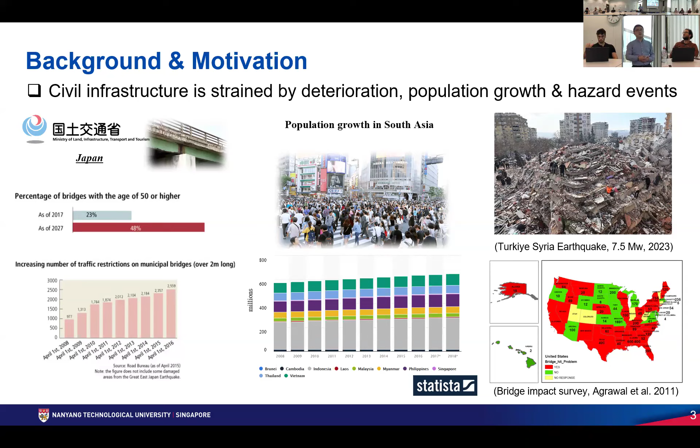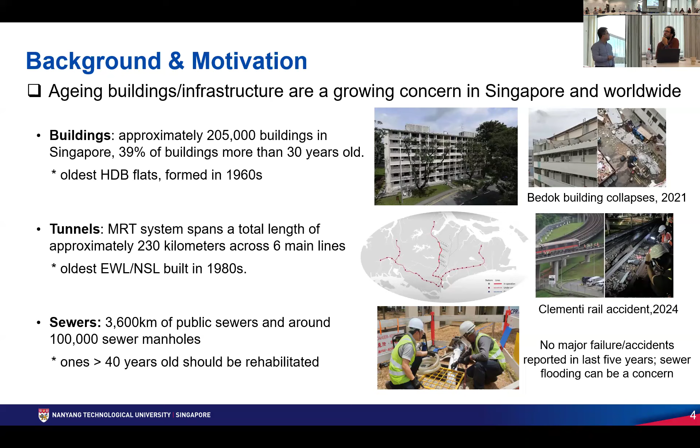For MRT tunnels, this is basically the subway system, we also have a similar situation. We had a couple of accidents happening in the last 2 years, with a lot of downtime cost. And sewers also have a similar situation. So SHM, basically structural health monitoring, can help us.

When we talk about structural health monitoring, we talk about damage detection, we talk about structural health monitoring systems. My background is more focused on structural health monitoring systems. We need sensors, we need to deploy the system continuously for a long time to collect the data, to do condition assessments. Initially we did it wired, maybe 20 or even 30 years ago. I think the most representative example is the Tsing Ma Bridge in Hong Kong, with over 300 sensor channels deployed there.

But in that case, it's not easy to scale up to different bridges. This is just one of the significant structures in Hong Kong, but there are so many bridges, right? Can we expand that to maybe tens of thousands of bridges with a similar setup? So then people think, okay, can we move to wireless? Wireless basically removes the wires. It's easy for installation. If you have experience with lab tests, you'll be frustrated about how to keep the wires well organized, right? That's quite a challenging part, so that's why we go with wireless.

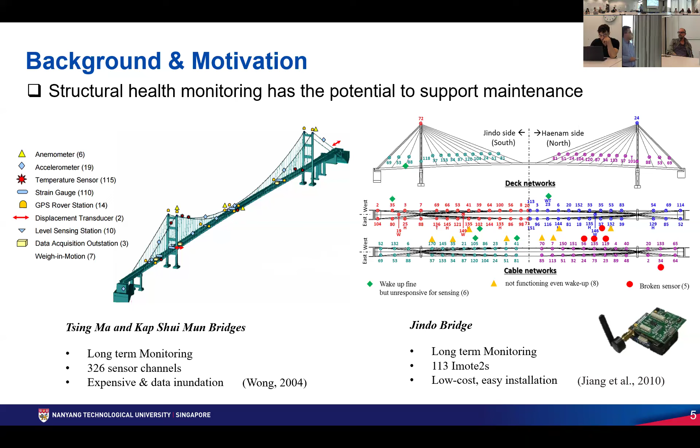With wireless we need to address the power, because wires usually provide the power supply. We also need to address the data transmission; that's the other challenge. The most representative example is the Jindo Bridge, with long-term monitoring of over 100 sensors. It's low cost and easy to install. So this is my PhD work; I'll just summarize it with one slide.

This is Xnode, which is basically the product of my PhD advisor's company, and we sell quite a few to different countries. My job first of all was to develop the operating system, a real-time operating system, which is quite challenging for resource-constrained edge devices. I also developed the trigger sensing circuit. Instead of doing duty cycling, which is basically to save energy because you cannot turn on the sensor continuously using a battery, you put the sensor into deep sleep, then wake up, then deep sleep again.

But in that case, we missed events like earthquakes. On the Golden Gate Bridge, there was a 1-year deployment, but it missed 3 earthquakes because of duty cycling. So that's why we were motivated to develop trigger sensing. Basically, if an event of interest like an earthquake or impact happens, you can wake up and then turn on the data collection.

I also want to emphasize that our work got support from SBIR, Small Business Innovation Research. A small amount, about 225K, but it's encouraging us to move forward. In this case, we're doing bridge impact detection, because there are so many overheight vehicles moving across railway bridges, and this type of accident may happen without notice or get reported after a couple of hours. So we want timely detection for that. Okay, so this is some of my background.

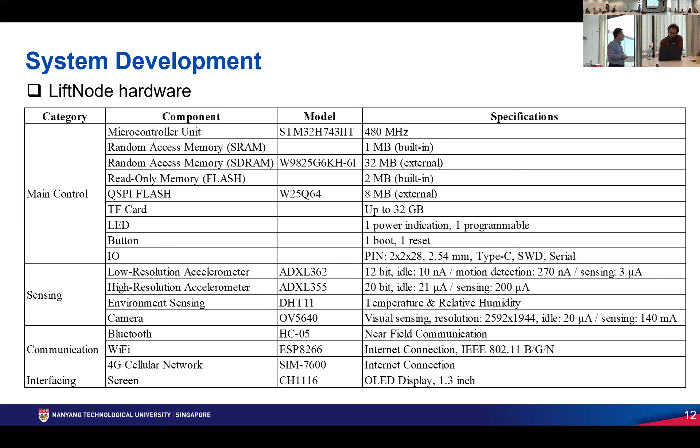Basically, there are the main control, the perception part, the interaction part, communication part, and the power part. Okay. So here's a table listing the components related to the model size and also specifications. For example, the microcontroller part, the memory part, the accelerometer, the camera, the Bluetooth, Wi-Fi, and also a screen as well.

So regarding the middleware, there's something called TinyML, tiny machine learning, because that actually is suitable for edge computing. Ours, we actually do it in a similar way, but we try to make it more domain specific for tiny structural health monitoring, which will include several math calculations, digital signal processing, and also AI technology related to structural health monitoring.

So the purpose is that we try to develop a middleware service such that other researchers in the community can directly build upon this middleware without building from scratch. And so that can save their time to do the edge intelligence analysis.

Basically, I'm not sure if any of you participated in the Hong Kong APSS summer school and conference, not really, right? Yeah, so at that time I also presented something, and the most interesting part is that we brought the sensor.

We actually purchased each component from Taobao, only 300 RMB for everything, and then we led them to do the hands-on practice, starting from the assembly of each component and doing the programming, and eventually they had their box of the sensor to deploy on the pedestrian bridge to do the modal analysis. So that's actually quite exciting, I believe, for the students.

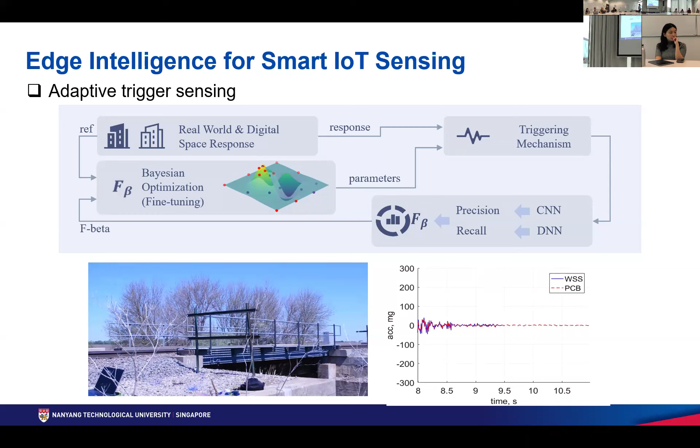So when the train crosses, that's in North America, we have the sensor turn on quickly, and after the train goes away, there's no vibration, and the sensor will be turned off. The dashed line is the wired sensor for continuous monitoring as the baseline or reference, and the blue one is the sensor for the trigger sensing demonstration.

So the other thing here is sensor diagnosis, which is also part of the smart sensing challenge we should address, because when we deploy sensors, there's always a concern that the sensor has a shorter lifetime compared with the building, right? That's one of the concerns for industry people in adopting wireless smart sensors. So we try to address it in two ways.

First of all, we try to do data anomaly detection. And later on, we try to do the fault diagnosis. We try to identify what is the real issue behind the phenomenon of the anomaly data. And then everything can be formulated by the AI model. So this model is actually trying to do the classification of different phenomena or different data anomalies, like drift, for example, and spike, for example.

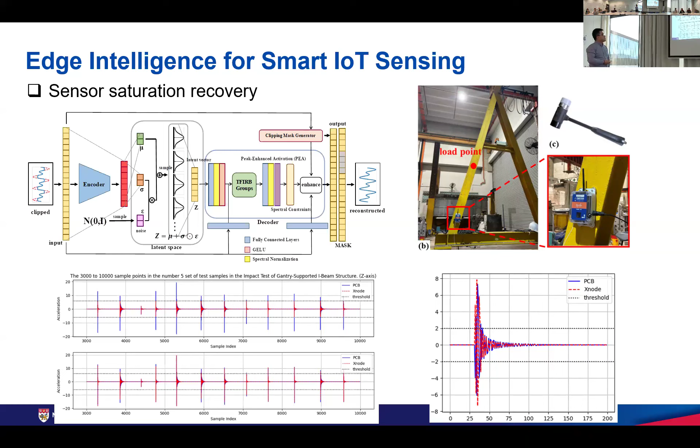So this is the AI technology, the autoencoder, and then we do some kind of domain transformation. Eventually, we can achieve a peak value that matches very well with the traditional ground truth value, such that we can avoid or recover the signal saturation. All right, so this is about the IoT part.

So this is basically the uniqueness of my research group. Because many people in SHM deal with the data directly from the sensor. They purchase sensors from a company and use the data for subsequent analysis, either signal identification, damage detection, or even risk analysis. So we push that part even further. If we can address the sensor, then we can make a bigger impact because everyone will use the sensor. If the data is good, then the result will be much better.

So the next task is what edge intelligence can do for subsequent applications, especially structural anomaly detection. This part could be more related to most of the researchers in the community. Anomaly detection is also an interesting or hot topic these days, especially with unsupervised learning autoencoders developing. Basically, we set the threshold of the normal condition, and if the signal says there's something wrong, we can pick up that anomaly and send a warning message to the bridge owners.

So one example is the interstory drift. When an earthquake happens, how do we quickly identify which building requires more manpower to do the inspection? We cannot send people building by building, right? It's very time consuming, especially when an earthquake happens in a big city.

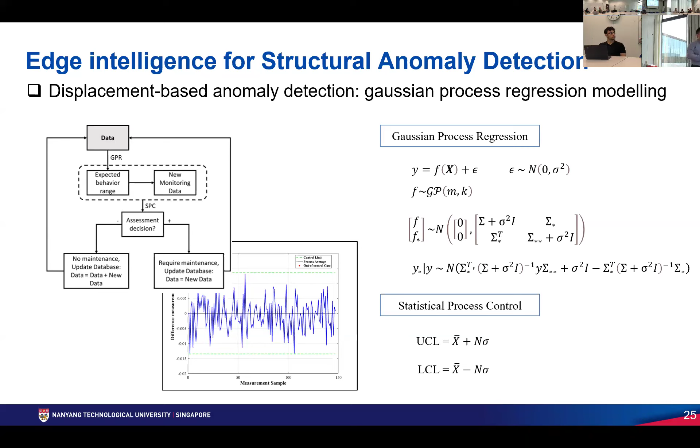In this case, we explore the usage of Gaussian process regression modeling. The idea is that we put the sensors on the piers of the bridge. For this timber trestle bridge, we have two pier planes. For each pier, we have one sensor on top, and when the train crosses, the bridge will vibrate horizontally. We use the horizontal deformation of one pier corresponding to the other pier, assuming they have a correlation when the train crosses.

If the bridge is in good condition, their correlation should be within a certain range. But if the structure has some damage, for example if we reduce the stiffness of this pier, then their correlation will change. So the idea is to use that relationship: each time a train moves across, we collect one data set, and we pick the maximum displacement as a single point on the figure here. Based on this data, we can build the Gaussian process regression model, and then use statistical process control to analyze how sensitive it is in tracking the damage.

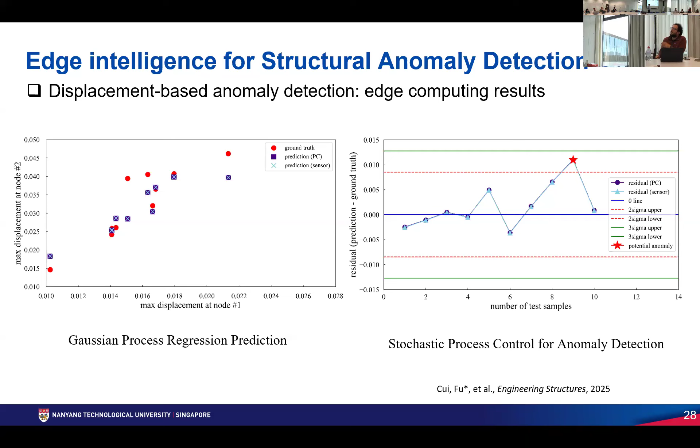Although there's some difference from the ground truth, the PC and sensor match quite well. On the right hand side, similarly for the statistical process control anomaly detection, we also get very consistent results. Okay, so this is the first anomaly detection, based on the displacement.

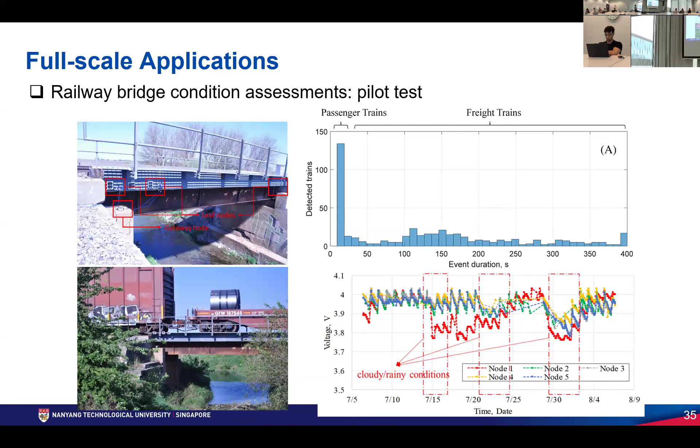And then we moved on to real structures for scaled-out deployment. There are in total, I think, 11 bridges in the deployment. This is what the bridge looks like. You'll see that it's quite old, right? A timber trestle bridge. Similar to what I mentioned, for each pier we deploy one sensor on top of it and try to monitor the lateral displacement of these piers.

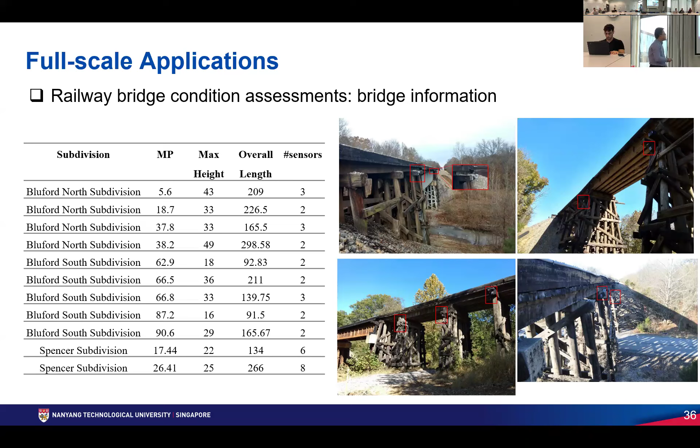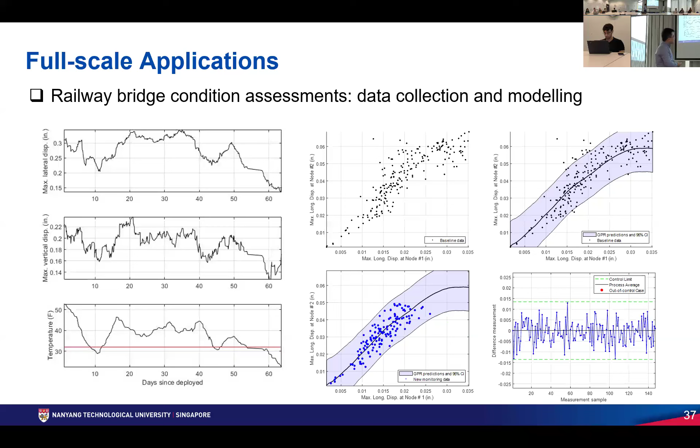And then here's the kind of data plotting or accumulation, and eventually we can build this type of Gaussian process regression model. And for new data sets coming in, we can first check if it is within this kind of safe range. If yes, then we can further fine-tune this model. Otherwise, we can do this type of statistical process control to identify the data points exceeding the thresholds. And then based on the statistical analysis of how many data points exceed the thresholds, we can create this type of figure, classifying the bridge into green, yellow, and red, indicating the severity of the bridge damage condition in the timber trestle bridge.

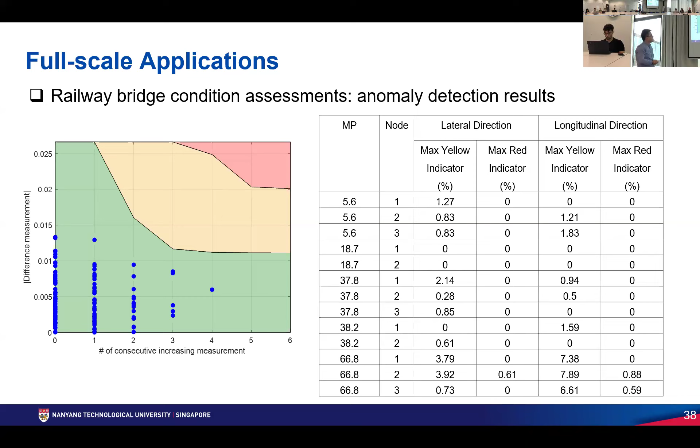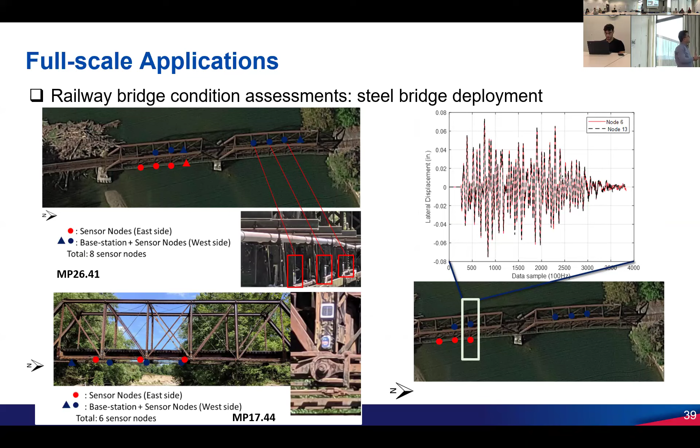On the right hand side, showing the percentage of the yellow data points collected for the over 1 month deployments of the different bridges. Okay, so this is for timber trestle. We're also doing steel bridge deployments. Okay, so here's one steel bridge. Here's another steel bridge. We do the same thing. We collect the acceleration. We do the displacement estimation.

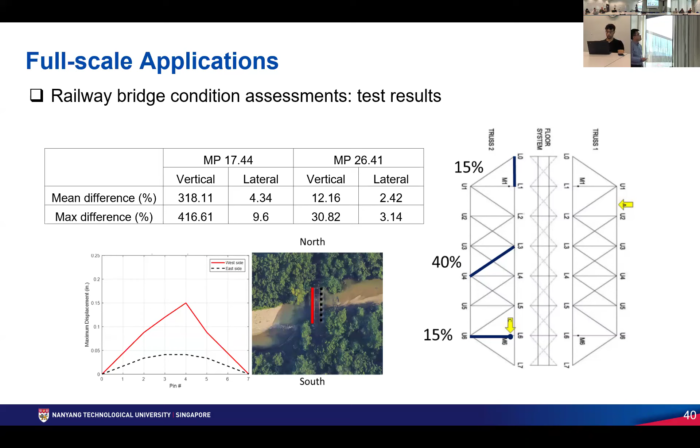And the second application is about railway track anomaly detection. So in this one we are still dealing with train crossing events monitoring, but we focus more on the track defects, including fastener failure, wheel flats, and also rail corrugation. Yeah, so this is actually becoming more and more critical in Singapore, where many accidents happen because of this type of fault.

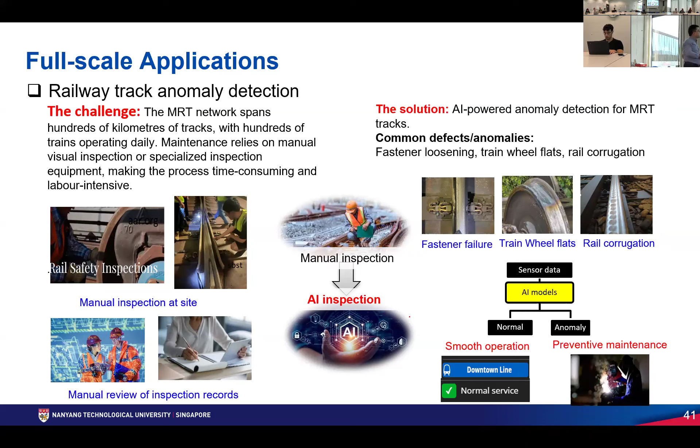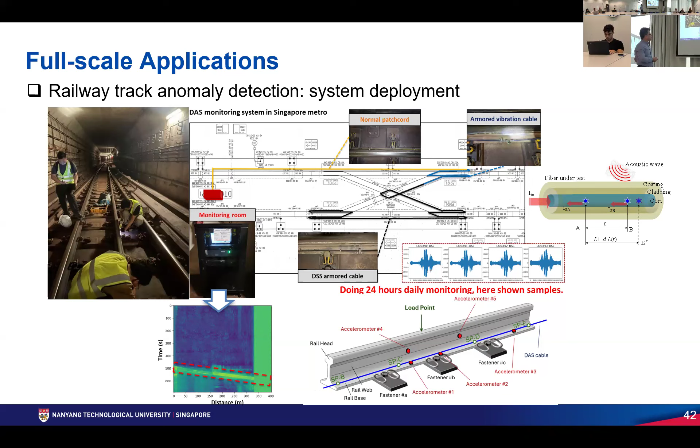Okay, so here's the deployment of sensors. We put the fiber optic sensor around 1 kilometer for the Bukit Panjang MRT turnouts, and we also deploy the IoT sensor in several locations to collect the acceleration. And here's an illustration of how we do the fiber deployments and also the accelerometer deployments as well. And here we also use the trigger sensing strategy, meaning that when the train crosses, we wake up the sensor system for data collection. In total, we can capture around 200 train crossing events per day over 24 hours.

Professor, would you like to summarize so we also have time for a short question? Oh, sorry. Yeah, sure. Okay. Let me just quickly go through.

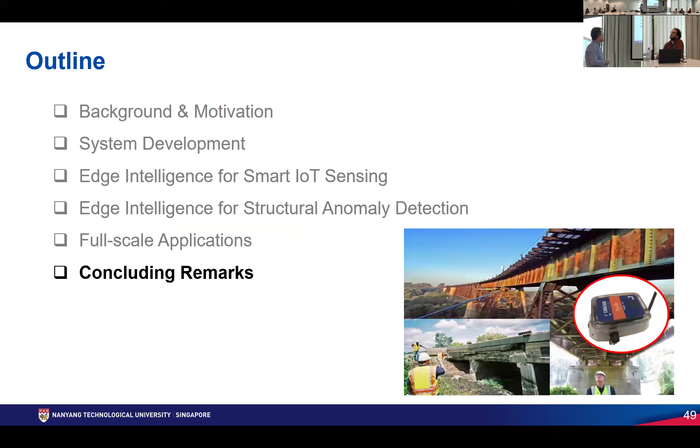I introduced the AIoT prototype, which especially supports edge intelligence. And edge intelligence is very helpful to reduce the cost and scale up the deployments. The first application is about how we make the sensing smart, in terms of trigger sensing, fault diagnosis, data imputation, and sensor saturation recovery, such that we can upgrade the low-cost sensor to be more powerful. And the second edge intelligence application aspect is structural anomaly detection, such that we can scale up the deployments with minimum effort. And lastly, I talked about two full-scale applications, including railway bridge monitoring and rail track monitoring. One is in North America, one is in Singapore.